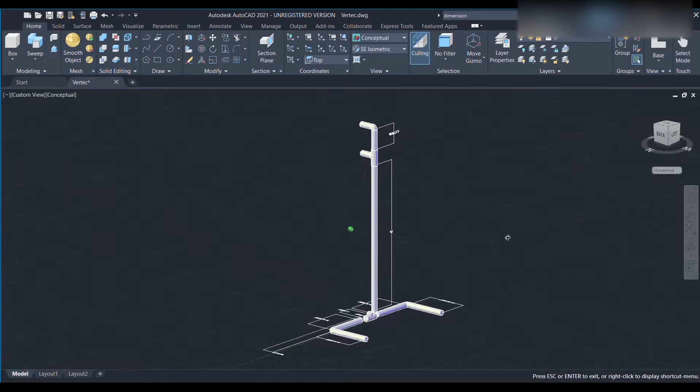Okay, so this is the project and let me show you around. Disclaimer: you don't have to know how to use AutoCAD or how to design things in AutoCAD in order to do this project. I'm just doing this only to explain things to you in a better way visually.

Now let's get to the project. So I've divided the project into 3 parts: the base, the trunk, and the head, right? Alright, so let's start with the base.

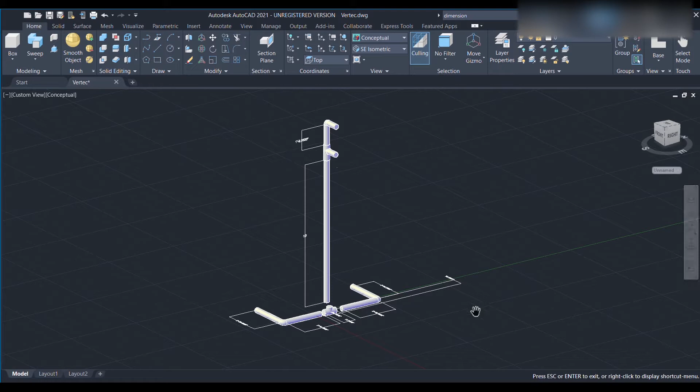So if you look at the base, we have 2 pipes in the y-axis and 2 pipes in the x-axis. They are connected using 2 elbow joints and they are of equal lengths and equal diameter. The length is 2 feet and 10 inches, but actually they are 3 feet each if you account for the elbow joints. And the diameter for all the pipes used in this project is 2 inches.

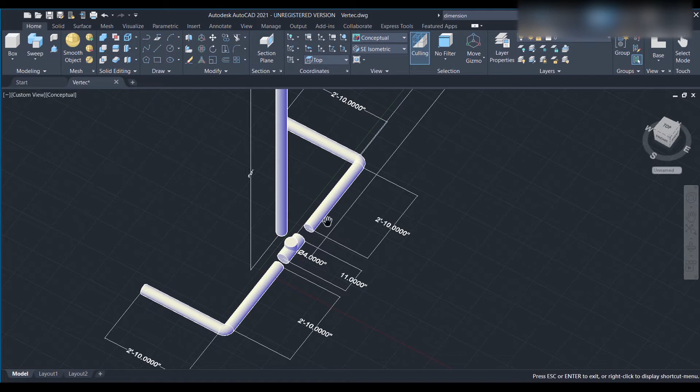And then we have one T connector in the middle on which we can mount the body of the vertec. So once you get all the parts, you have to connect them together and then use a PVC glue and stick them together. So next is the body of the vertec, and there's nothing much about it. It's just a single pipe of length 10 feet. You can adjust the length according to your needs, and that's about it.

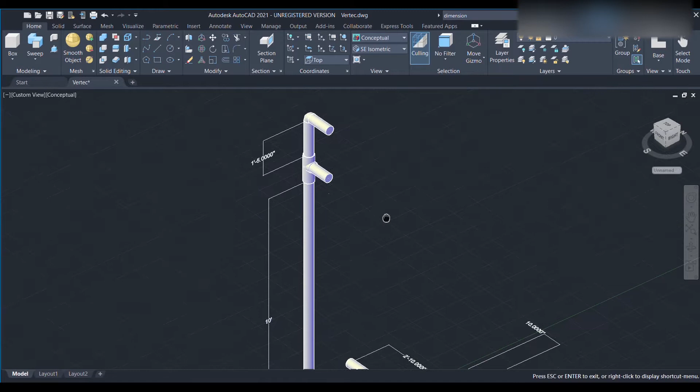Next up is the head of the vertec. As you can see, we have a T connector, we have an elbow connector, we have 2 pipes in the y-axis, and we have 1 pipe in the z-axis. As for the dimensions, the pipe in the z-axis is 1 foot and 5 inches, but you can customize this according to your needs. If you want a bigger range in your vertec, you can go for like 2 feet or something.

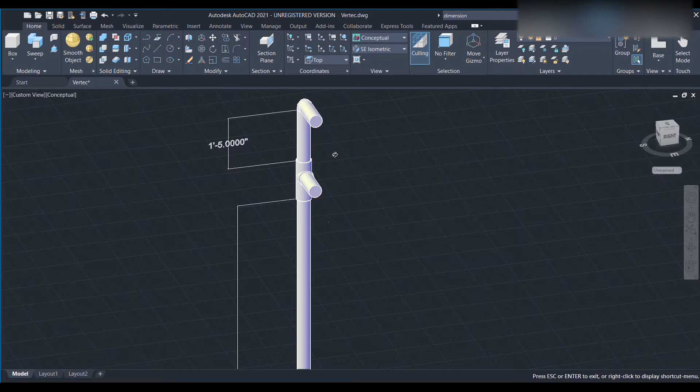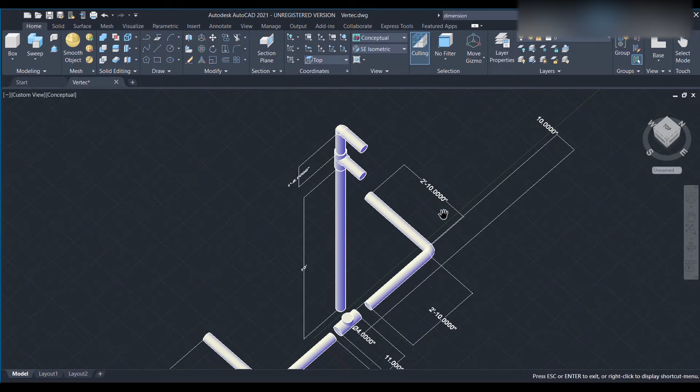And then for the pipes in y-axis, it is 10 inches, but you can go up to 1.5 feet, I guess. Anything more than that will cause the center of mass of the whole structure to come forward, and then the structure will fall forward. Also, we'll be attaching the thread rod between these 2 pipes, and the thread rod will be having the rotating wooden portions which we tap on.

So what this is doing is, it is increasing the mass in the top portion of the vertec compared to the bottom portion, so it won't be stable. It is eventually going to fall forward, right? So there are like 2 ways to tackle this issue. One is to increase the length of these 2 pipes in the negative y direction, so that way we pull the center of mass back, thereby keeping the structure stable.

So if you ask me by how much we should pull this back in order to keep the structure stable, ideally any length that is half or greater than the length of the vertical pipe should do good. But practically nobody is going to be having that much room to work with. So the alternative solution, the solution that is used worldwide, is keeping weights on these 2 pipes.

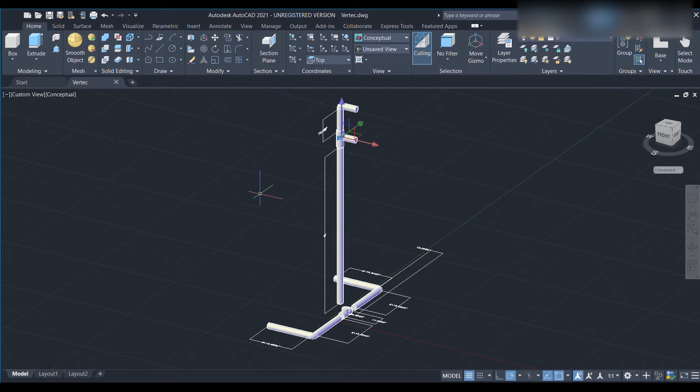So that way the mass of the top portion and bottom portion is balanced and the structure is going to be stable. Alternatively, you can use some kind of a string or a thread to tie the head of the vertec either to the base or to some kind of support which is behind. So this way we can pull the center of mass back and keep the structure stable. Enough theory, let's get to the practical work.